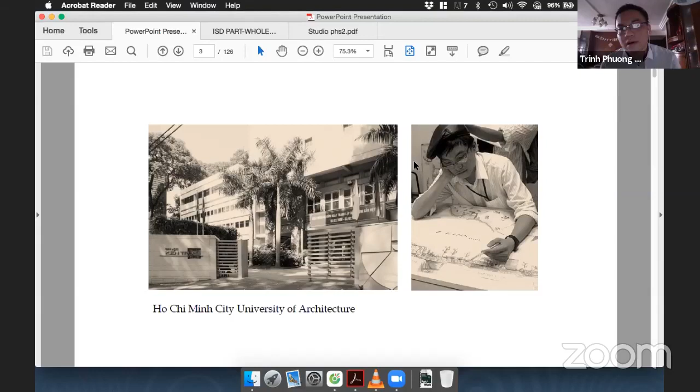This is what students learn and do at my school. In the first and second year, we started with hand-drawing based studios, and some other activities like presentation and making models for discussion. This is our first and second year studio project. At that time, you needed to be very good at painting to do the visualization, hand rendering, and you start with some basic designs like villa, cafe shop, bookshop, for first and second year students.

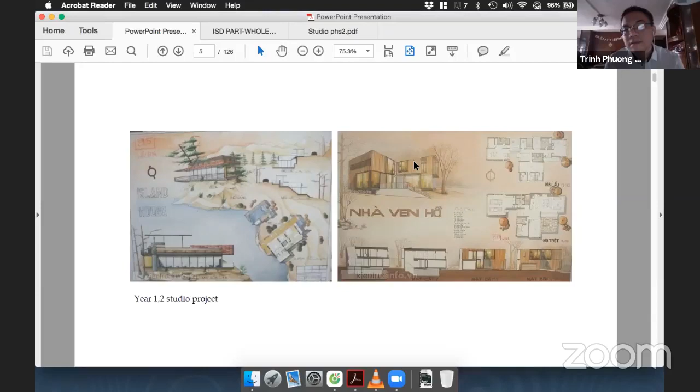At that time, I didn't have any idea about what sustainable architecture was. No, I didn't know anything about that. This is my friend's studio project and my studio project. You can see the difference, a huge difference. Actually, I'm not good at painting compared to my friend.

And at that time, I felt a bit ambiguous, worried about my future career. I didn't know, because I felt very reluctant when I did a studio project. I didn't know what I should do for my future career, I didn't know at all. And when I saw the grading, compared between me and my friend, I felt very disappointed. Sometimes I lost a sense of direction. I didn't know what I should do for my future career. Sometimes I felt, well, maybe I chose the wrong job already, and I just always wondered about that.

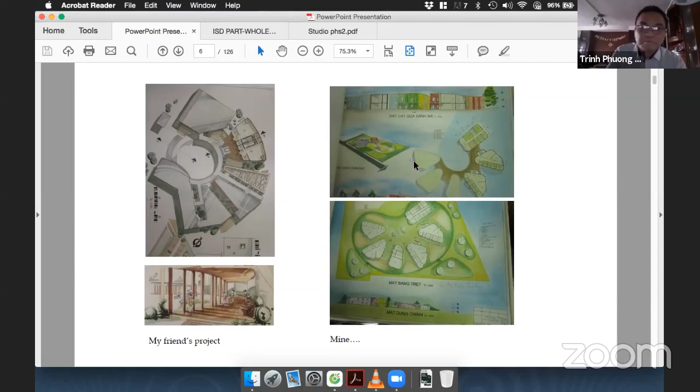This is my studio project, the kindergarten. At that time, I spent one night thinking about what is my advantage, what should I do to improve myself, to stand out among 100 talented students in my batch. And I dreamed about working overseas, traveling overseas. At that time, I wasn't able to afford that. So I thought about that, and I thought about others' weak points. What is their weakness?

For me to improve myself, to stand out from all the classmates, I'm thinking there will be three things I can do in that time. The first thing is improving English, because our teaching medium is Vietnamese, not English, at school. I think if I am capable of conversing in English very well, I can have an advantage compared to my friends.

I'm not good at painting, I don't have the aptitude in painting. So I start learning about BIM, SketchUp, and CAD by myself to improve as much as possible. The third thing, because I'm not good at the school project, is competition. Maybe it's a good chance for me to win a design competition, and have a chance to travel overseas.

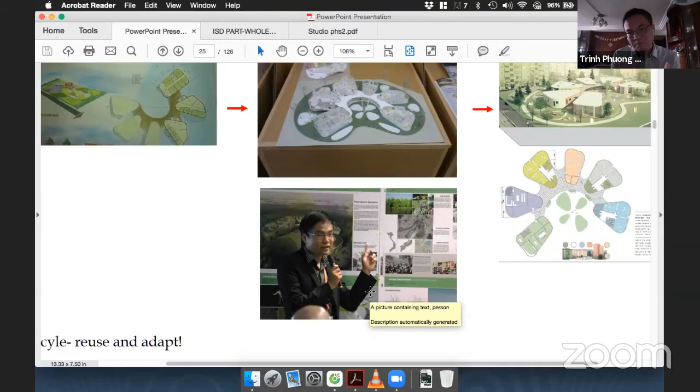I retain the form and shape, it's inherent for myself, but I change the function. You see how it's affected. And in this competition I won again, I was selected as a finalist. So try to reuse and readapt.

For this design competition, I submitted for a Milan competition for the town council, who want to construct a new kindergarten in the outskirts of Milan, Italy. I won second prize. It's a pity I didn't win first prize, I would have gotten my first building realized in Europe already.

But for other competitions, the more mature you are, you need to be professional and improve your presentation skills, which can change the game in the last minute. Your project may be good enough to be shortlisted, but if you want to win first or second prize, you need to be very good at presentation to convey your idea and persuade the jury and audience. This needs practice. Practice makes perfect - even I needed to practice a lot from my very first competition.

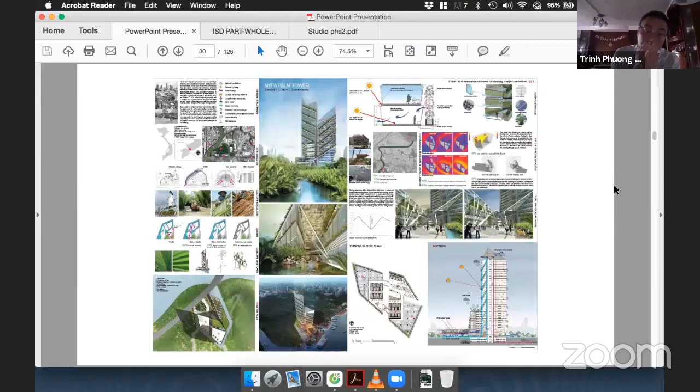When jury members look at your submission, they have to check hundreds of entries and don't have much time. So you need a very clear title, legible, with your target indicated on your panel. They need to quickly know what your project is about and what makes it impressive. Make your title clear and clean, so even a fifth grader can understand what you're talking about.

The second thing is you need an impressive rendering that's easy to understand. When I talked to Safdie, he told me after the break why he selected me as a finalist. He said it was because he looked at my second rendering - he had been to Vietnam before and was interested in Mekong Delta culture and its tropical atmosphere. It looked impressive, and that's why he chose me as a finalist over 100 submissions. So you need a rendering that's catchy for any audience.

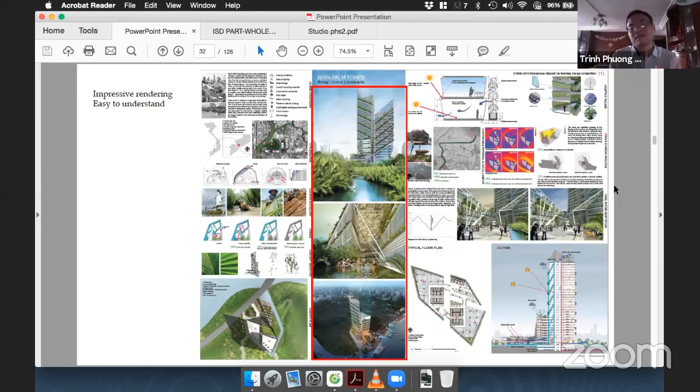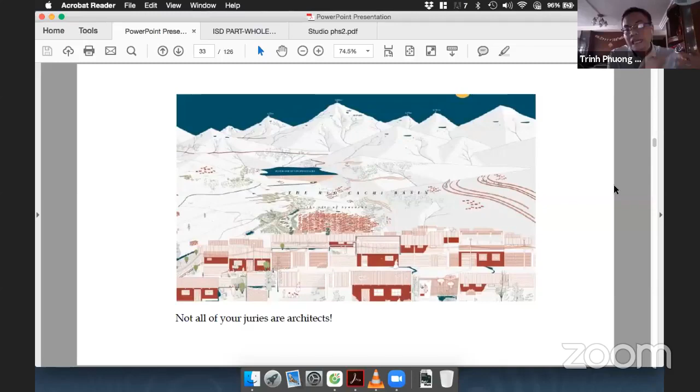So I persuade you to use realistic rendering, one or two, so anyone can easily understand what you're talking about. This kind of rendering is good - you can add one or two in your submission to balance architectural aesthetics with being easy to understand for people outside the architecture background.

Of course, you need some prologue or description, because people need to read a bit - but don't put a whole panel full of text or methodology. Just briefly introduce your project: where it's situated, what your target is, what your idea is, and how you translate it into form and function in your design.

For design strategies, if you're designing a sustainable tower, briefly indicate the strategies involved - like natural ventilation, lighting, solar energy, local human resources, rainwater harvesting. Put it with icons so anyone who doesn't have time can easily understand.

Don't forget basic information like GFA, height, plot ratio, and green ratio, because most students just convey the concept, not the data, which is crucial for jury members, engineers, and designers. If everything is clear and transparent, it makes you stand out among 100 submissions.

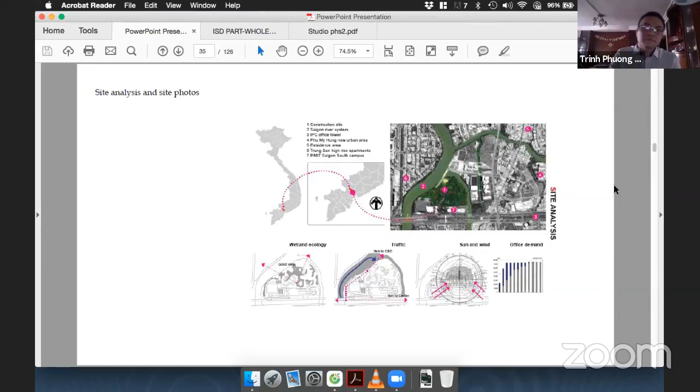And for the diagram, you see the big angle. You need a very good diagram, a sequence of diagrams to convey the idea to anyone - it looks like a comic book rather than architecture design. Make sure that any of your ideas are conveyed into diagram. I don't need to write anything, but you look at this and you can understand what is my concept.

Some sketches are important if you're good at sketching, so please add it in. You need to explain some diagrams like how you're building, the function of your building, how to access your building, the traffic, human traffic, the green and blue arrangement in your building. Make sure everything is legible, clear, easy to understand as much as possible.

And of course, you need to put a master plan indicating the function of the building, even the plan. Don't put 5 or 6 level plans. You don't have to put any plan or section like a tender submission - just select the best view, the best plan which can convey your function, your design idea in the panel.

And don't forget to clearly indicate the function. Some students are kind of artists - you put the plan and ask other people to understand, but they don't have time. So please make sure to put in the function, the arrangement, all the annotation, description, and the scale bar - quite important.

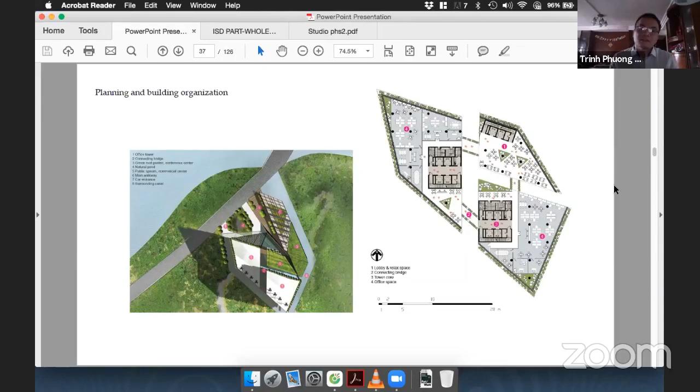For the section, it's quite interesting because it reveals all of your systematic work, how your space is arranged, your strategy, your sustainable strategy. So in 1 or 2 sections, please indicate it clearly. If you have your strategy, you should put it in.

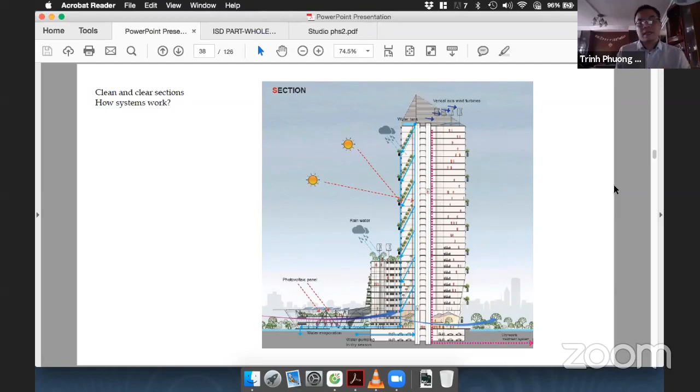So here you can see how the water is harvested, how the ventilation is applied for the ground floor, how the waste is treated, how the rainwater is harvested to water the green facade on the building. Just make your building impressive, easy to understand, and show how the system works.

The last thing I recognize - in any competition, we are just focused on the idea. You have a great idea and you think anyone should be interested in that, but that's not enough, because apart from the quality of your design, we need some quantity analysis, because it reflects the result, the efficiency of your strategy. So if you can do the simulation, if you can do the analysis, please put it in.

You should use icons and percentages. Like here, I show 40% of solar radiation is reduced on the facade after I do the simulation. So I can present anything in a percentage figure. Anyone can just take a look at this and easily understand - it's very persuasive and so clear.

Like you got 70% of the walkway area, public space covered by shadow - you indicate it on your panel with your simulation and analysis. So every jury should trust in that, trust in your design. You have the clue, the consequence, and the very good result. Make sure to use icons and percentages to visualize the quantity and quality of your design.

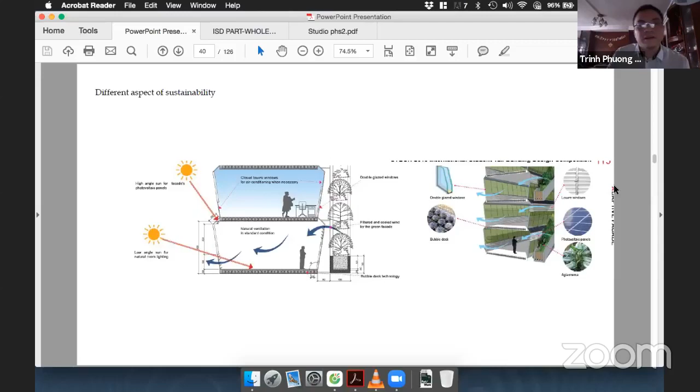I think most of you will be familiar with that, so please have blow-up details indicated on your panel. So in conclusion, we need it clear, clean, easy to understand - anyone can understand, even if they're not from an architectural background. A 5th grade student can understand what that design is and the logic. We need to indicate the quality and quantity of your design.

Anything should be presented by number. And finally, it should respond to the judging criteria. So that's the 5 important things in design competition.

Okay, so after competition, let's take a look to improve our portfolio. Not all of this is mine, but I refer to some other external sources and from my experience, I share with you.

Portfolio is a crucial part for our architecture student, right? If you want to apply for a job, where's your portfolio? You want to pursue a postgraduate study, where's your portfolio? So portfolio is a collection of assets in your design work. You should show your skill and think as a designer, how well you can communicate. And it should be your project.

So I take an example from my friend. He graduated from Harvard, and was also a finalist in the competition in New York, and we know each other, so I take his portfolio as a reference. The very second page of your portfolio should include a short CV or a content page, because if someone wants to review, you need to indicate your CV instead of a separate CV. It saves their time, and they know more about you. You should add some photos here, like if you are in the crit - it's very impressive.

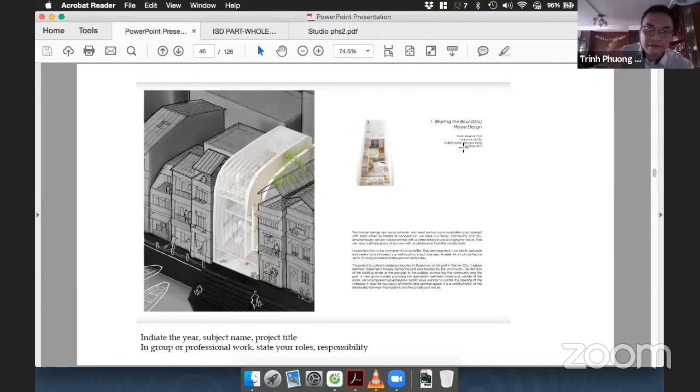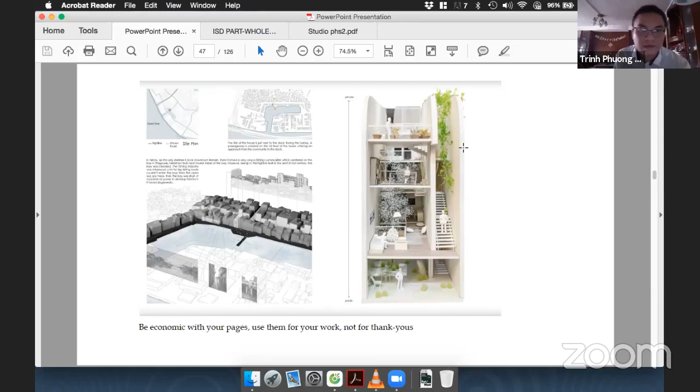So be economic with your pages. Use them for your work, not for a 'thank you' page or posting very irrelevant content. Because some portfolios restrict the number of pages - 30 pages, 50 pages maximum. So be economic with your pages.

And the layout should be professional - if you can, do it in InDesign. You should demonstrate the sensibility of care in the layout. You see all of the images are aligned, put in proportion, text, images, annotation - anything is very clear, very neat and clean. So be professional in the layout. Try to use InDesign or maybe other layout software for this task.

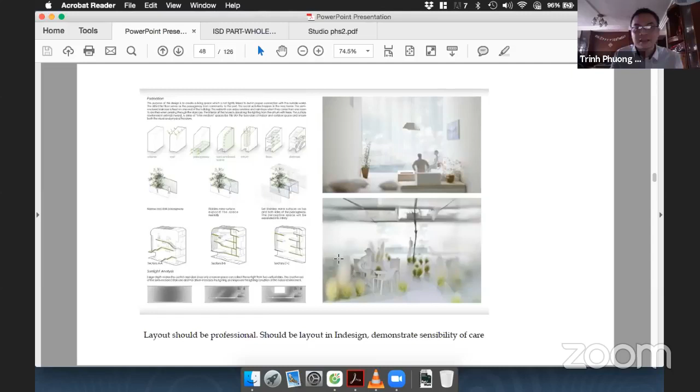In your portfolio, you need to demonstrate a wide range of skill sets - maybe hand drawings, sketches, physical models, construction drawings if you already work in a firm, photography, render images - you should put it in. It should be a collection of a range of your skill set rather than, if you can, rather than hand drawing only or rather than 3D model only. It should be a combination of these things.

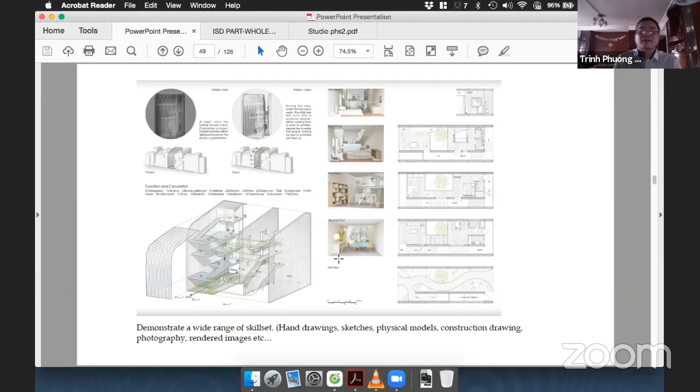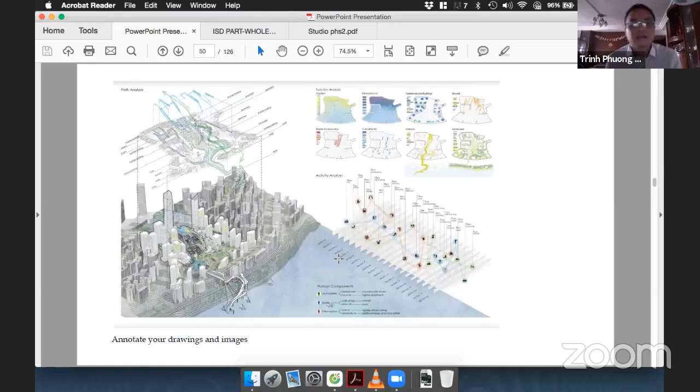And you need to annotate the drawings and images. This is a very familiar habit problem of architecture students - we get lots of good and wonderful rendering and diagrams, but we don't put any annotation, so no one knows what it is about. So for any analysis, any diagram, annotate it carefully so anyone can understand what you are talking about.

And because in this period the hard copy is gradually being omitted, disappearing, you need to do something with the online portfolio, right? You should have your personal website, a kind of online portfolio, demonstrating your project. This kind is very interesting - you can promote yourself, then if they are interested in you, they can take a look at this. It's very helpful.

And if you don't want to do a website, you can upload a portfolio on some publication platform like Issuu. It's a very good virtual portfolio platform. So you upload your portfolio, your collection of work here, and anyone can take a look at this. Very interesting.

Some sources I persuade you to take a look at: Issuu, Wix. Wix is good, very free - all of them are free, you don't have to pay anything. On Wix.com you can design your own website, just drag and drop from the layout, and then you have your online portfolio published. Squarespace - if you have money, you can invest like $20 per year to register a domain name with your name, like rtabc.com. So it's a kind of branding yourself for people in the world - they can look at this. It's free, and believe me, it's very easy to use.

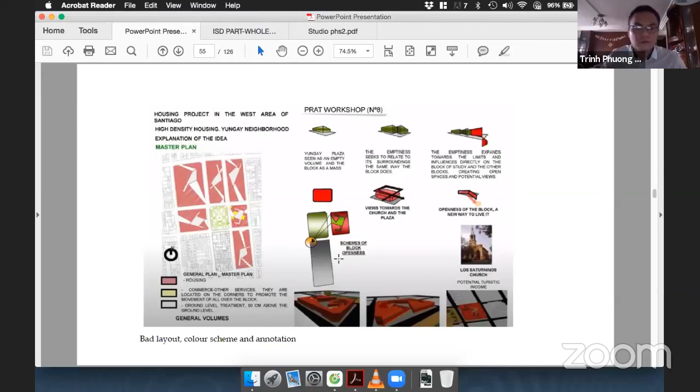So some examples we can use to avoid making this mistake. Like you see this curve layout, it's a quite bad layout. The color scheme looks very itchy, it cannot catch my eye. And the text and arrangement is not tidy at all. So make sure that we do not do this kind of bad layout, color scheme, or annotation.

Make sure, this kind of layout, you can put some hand sketching, but if it's not good enough, think about it, shouldn't we put it in or just ignore it? You see the layout is not well prepared and arranged. This is a very familiar mistake, and I used to do that before.

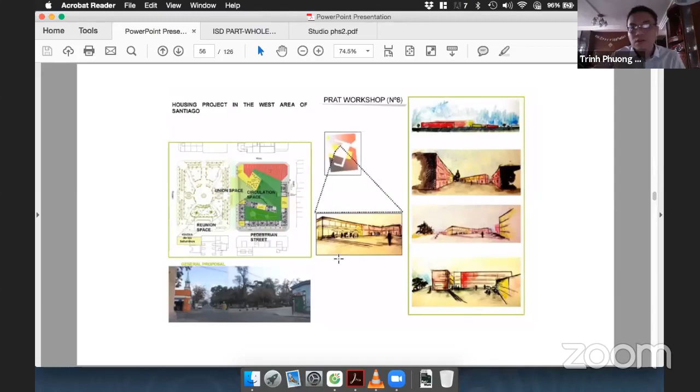So you need to look at some examples, like Issuu or Wix. Look at the portfolios, how they arrange, how they do the layout, to improve. Do not make any mistake like this.

Some students put the grasshopper code, the visual code, on it. It's still quite impressive, but if I am not an architect, if I am just a town council member, I don't understand what it is about. So do not put this information unless you want to demonstrate your Rhino skill, Revit skill, or coding skill.

So the third part is about...

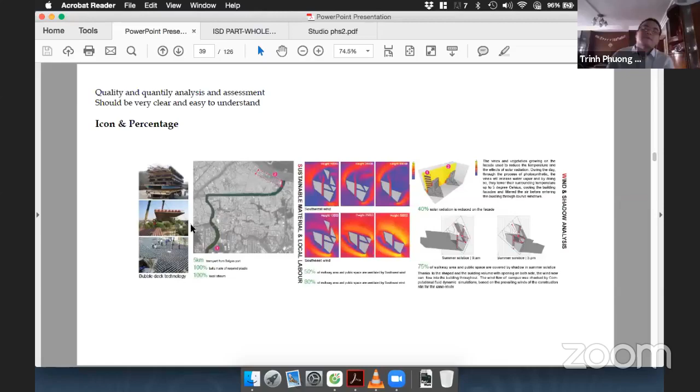Thanks, okay, now I think we can resume with your talk. I don't want to steal your show, I mean at the moment. Yeah, we thank you, okay, you can now resume.

Okay, let me start with part 3: studying and working abroad, what I have learned about sustainable design. What did I change in my mind? I changed my thinking about design and architectural work.

So let me talk about why I chose Singapore. Singapore is one of the developed countries in Southeast Asia, even in the world. They have a very good background in sustainable design, and it's situated in Southeast Asia, so I got familiar with the culture, and importantly, the language is English. Singapore has a quite lower tuition fee compared to USA, UK, Australia. And importantly, because I want to work after graduation, Singapore offers a work visa available for foreigners.

If you're under the MOE bond, Ministry of Education bond, you are eligible for 3 years of working after graduation. It's a duty. Compared to USA, obtaining H1B is very tough, and it also depends a lot. So Singapore is a good choice for this.

They also have a tuition fee loan and financial scheme available for international students. If you attend public school, it's near my hometown, so I can travel back to visit my family at the weekend - a similar culture. Importantly, English is the working language. I worked in Europe before, in Belgium, and because of language - they use French and Dutch - it was very tough for me to find a job and adapt to the environment there. So all of these reasons are why I chose Singapore.

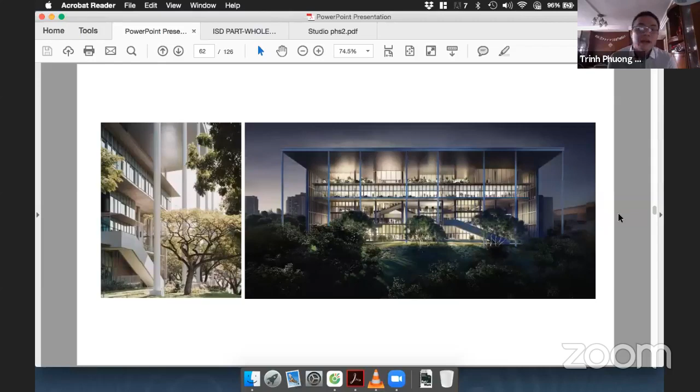The interesting thing is that they apply a lot of passive design strategies, rainwater harvesting, and even all of the energy is net zero because we have a rooftop system to harvest energy from PV panels. So you do not need to rely on electricity from the town. This is a good place for you to learn sustainable design from this building.

I attended this Master of Science in Integrated Sustainable Design, which is quite familiar to my favorite field. Let me introduce you a bit about this program - actually my professor wants to introduce it to you.

It's focused on Singapore and Asian conditions, tackling challenges at both building and urban scale, integrating knowledge from disciplines of architecture, engineering, landscape design, planting design, urban design, and biological design science. So if you don't come from an architectural background - you're an HVAC engineer, or a landscape architect, or urban architect - you can still join this postgraduate course, no matter where you came from.

And students came from a variety of disciplines. In my batch, some students came from China, India, the Philippines, Indonesia, some from Europe, USA. At that time, I was the only Vietnamese in my batch.

And the important thing is it's a 1-year degree, so you save a lot of time and money. I just wanted to quickly graduate and find a job, so I chose this program. It's appropriate for me since I don't have to invest too much in the tuition fee.

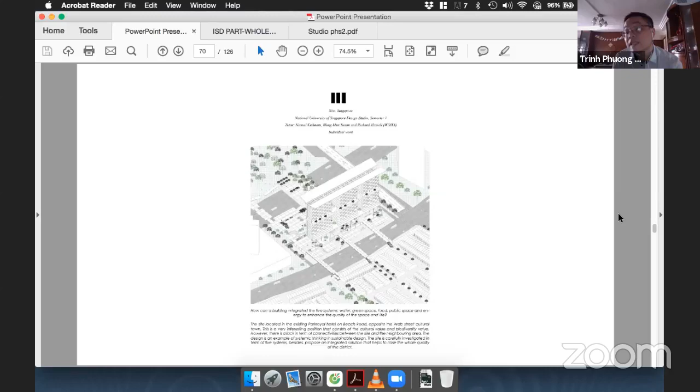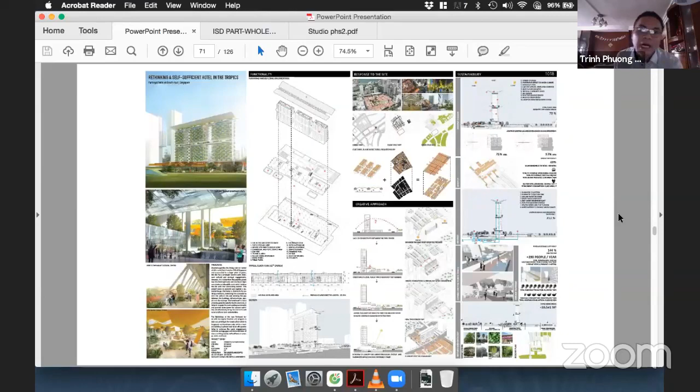In this design studio, we were very lucky because we got guidance from architect Wong Mun Summ from WOHA Architects, one of the most famous architects in Southeast Asia, who taught this building scale project. This is my project - actually a submission for another competition after my design studio project. You can see I strictly followed the rules I mentioned before about this project. So this is a rethinking of a self-sufficient hotel in the tropics, a case study in Singapore, the Parkroyal Hotel on Beach Road.

So the very first stage, we need to respond to the site.

So we study the building in terms of the 1 by 1 kilometer scale. We study about the surrounding buildings, because the building is now situated opposite to the Arab Street, which is a very

interesting tourist spot in Singapore. It inherits from the Malay, the Islamic culture. So it's very interesting in this area. You have the new and the old. You have the park, and the river with the water reservoir next to it.

So it's a very interesting location. We study about the asphalt map, the public space map, and the green space, and you see the integration, the existing condition of the site to their neighborhood. This stage took us three weeks to study in depth. This is just a very small portion of what I presented on the panel.

But this is just to give you some of the glimpse of what I have for the culture and architecture relationship, because it's situated next to the Arab Street, as you see in this area. So I'm thinking about how to make it integrated, incorporated into the existing site.

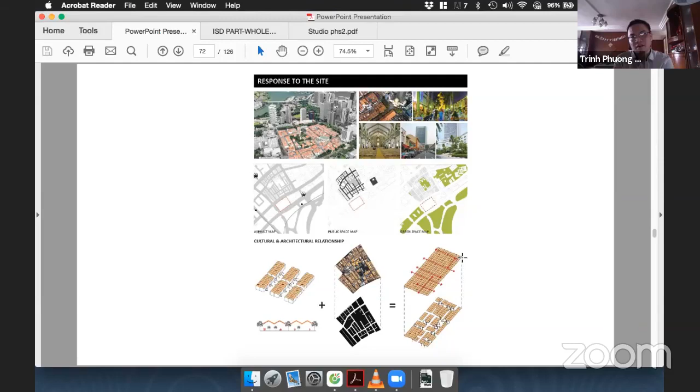So I was thinking about it, and I decided to make a very big roof as a community space, divided by different axes to make it an incorporated whole to respond to the site. And this is my design, a very big roof, orange roof, sloped like this, inherited from the existing site condition, to be a part of my building. So this is my idea.

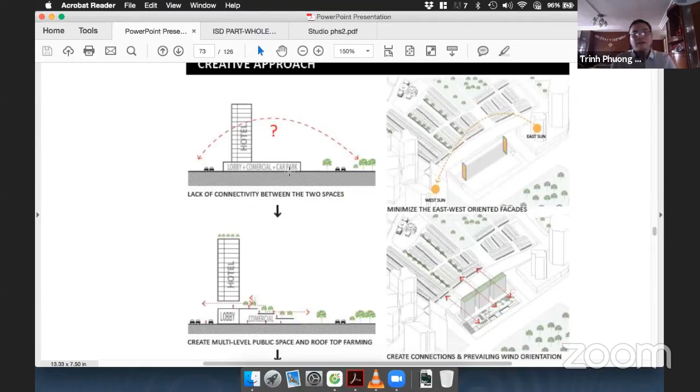So for the creative approach, from an existing building like this, a hotel with the lobby below. Let me zoom it a bit. So I'm thinking about it - with a very conventional hotel, lobby and commercial car park like this, it segregates the highway

and Arab Street. So I'm thinking about opening it up, lifting the hotel and the first floor plan, making it become an open public space, connecting with the tourist spot here, connecting them with the park, and incorporating the green spaces with the commercial space here. And we even free up the ground floor - it's not enclosed anymore.

You can free the ground floor, so we have multiple access connections between the park and Arab Street. And all of this will be covered by a system of roof, which helps equip solar PV to generate electricity, create shadow, and incorporate with the green, and even help with water harvesting in the building. So now it becomes a unified whole, incorporating the building into the site.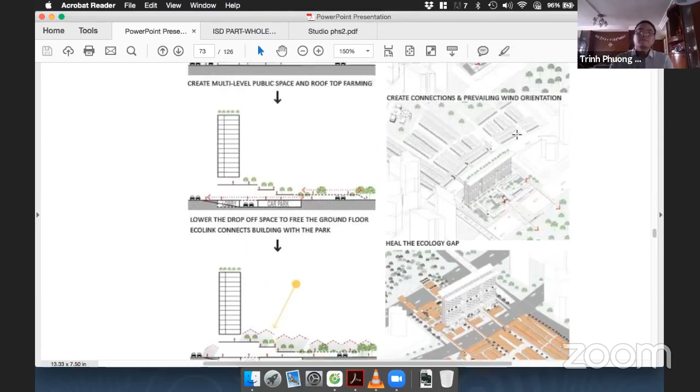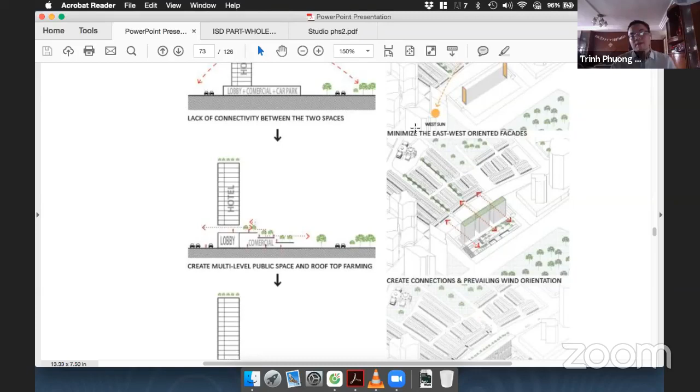You see the building arranged on the east and west orientation to reduce the effect of solar radiation. We connect with the prevailing wind orientation, creating a connection with the site. There's a very big mosque over here, so it increases the connectivity between the existing old and new town, and even has one or two more pedestrian overhead bridges to connect with the park opposite.

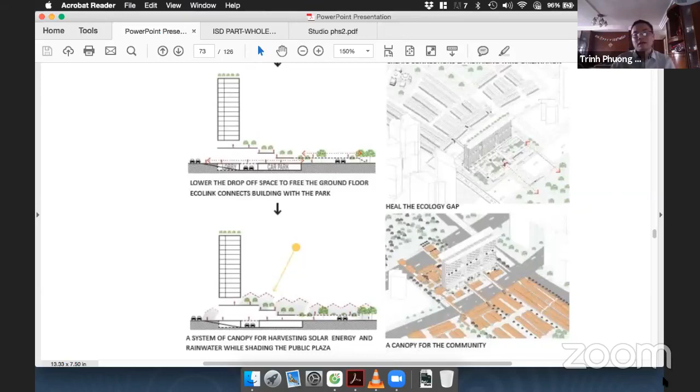And everything is covered with a system of eaves and roof to represent the color, the architecture form and shape of the opposite side, the old side, making it spread around, connecting to the park opposite. So that's my idea.

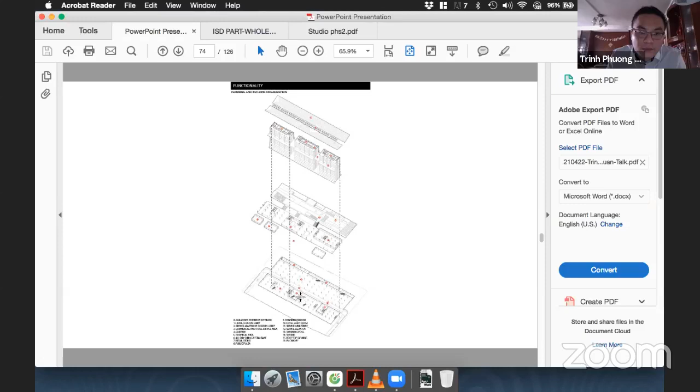And this is my function - actually it's a student project. So you see, I use an isometric to show the resident block, the hotel, restaurant, the commercial block, open space, even parking. I do it in isometric like this, and all the spaces are indicated.

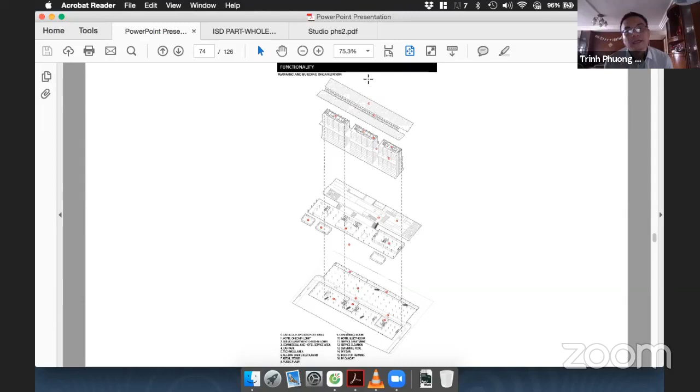So I have a big roof doing farming on top, to make it not only self-sufficient in terms of energy and water harvesting, but also energy and farming self-sufficiency. So this is a section.

You can see we have a quite big roof, harvesting water for plantation, for urban farming, a lot of solar PV, connecting to the existing site. So even the form, the shape is incorporated into a unified whole.

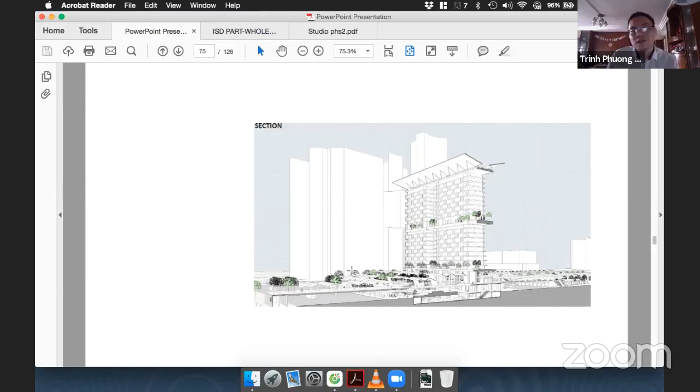And this became a spreading of the Arab Street tile, spreading to the park with a lot of activity, open air activity, and all of these areas are shaded with solar PV on top to generate the power for a self-sufficient building.

So the other sustainability aspect, like passive design, we studied in depth with the solar graph to indicate sun orientation, and calculated for the passive design strategy what percentage of area has natural ventilation. We studied the skin of the building, the facade, based on angle and orientation, to see how much area is covered by shadow, and how much electricity we can generate from the rooftop.

We studied whether it would accommodate enough for the residents in the hotel. After a couple of tries, this is the final result: we nearly achieve 40% energy sufficiency. Because the hotel uses a lot of energy for cooling and lighting, this is the maximum we can achieve. Hotels are quite tough for self-sufficiency.

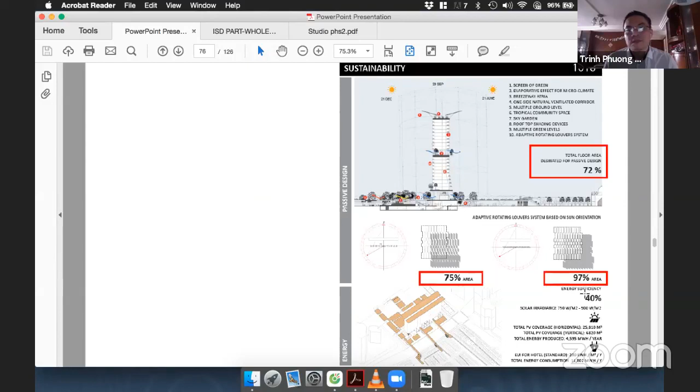We studied the water, how we harvest water for watering plants and for urban farming, and how to incorporate water features in the design to improve the local climate and atmosphere, combined with the landscape. For food and vegetables, it's enough to be self-sufficient, 144%, which can also provide for the neighborhood. For water, it's enough too, 2 times double the required amount for watering plants and even for cleaning or flushing in the hotel. That's our target, and we meet the target.

All of this information is represented in icons, very easy to understand, all the facts and figures. We needed to calculate and present it very clearly, making everything quantitative to understand.

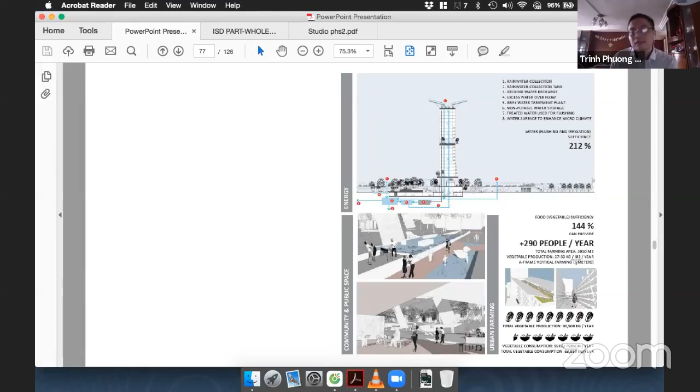So this is my project. The second thing I'll show you comes with a book, which I'll share with you later. This is one of the latest books from my professor, incorporating 3 consecutive studio works, urban scale design projects, about what we've done in the ISD program on sustainable design at urban scale and metropolitan scale. Later I'll share the full link to the book so anyone interested can look at it.

In my year, 3 years ago, we had a great trip to Shanghai, one of the largest cities in China and maybe in the world, a metropolitan. Shanghai has grown rapidly and experienced drastic spatial restructuring over the past 4 decades, since the economic reform began. Now Vietnam shares a similar situation, having started after the economic reform.

There's been a lot of transition in urban pattern in Shanghai, and the city quickly became the world's largest cruise port in the industrial area. It's designated to become a new district promoting international trade, scientific innovation, and entrepreneurship, imposing constraints on the district—a kind of district lost in the urban transition. So we thought about how to improve it.

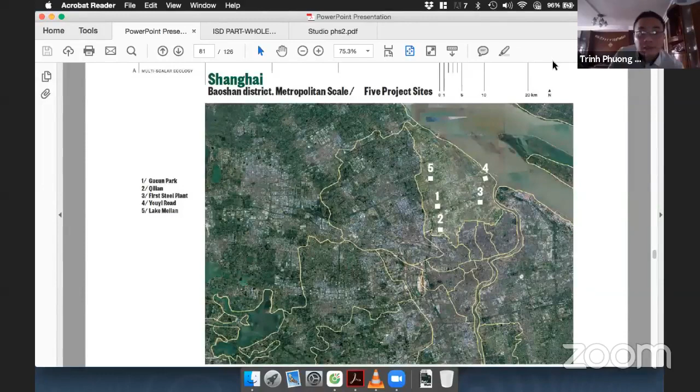In our year, we study Shanghai's Baoshan district. We are divided into 5 groups to study 5 different locations: Gucun Park, Qilian (the first steel plant in Shanghai), Youyi Road, and Lake Meilan. So we study 5 sites with different locations and characteristics, as shown on the plan. Our group focuses on Gucun Park, this site.

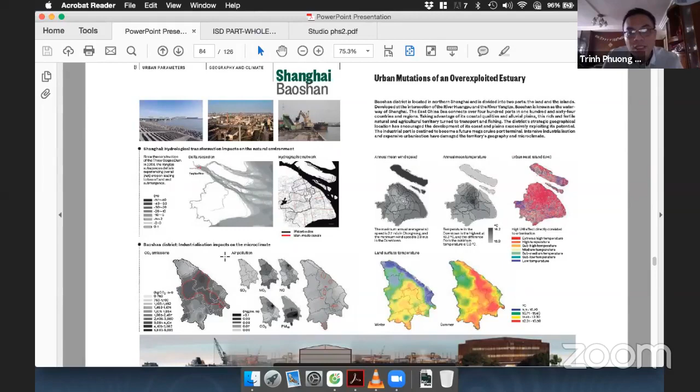We do geography and climate study, because each city has different and similar climatic conditions. So in the very first stage of our project, we study this, which has a lot of effect on our design. We also study the microclimate of Shanghai and Baoshan district, including the tidal map, elevations, water bodies, air quality, and air temperature map. We do the mapping and look for information. Students take one month to do this analysis and conclusion. This is what we've done for the first stage to study the climate of Shanghai and Baoshan district.

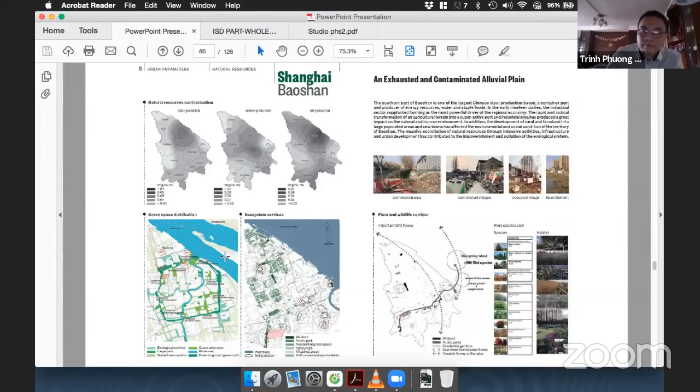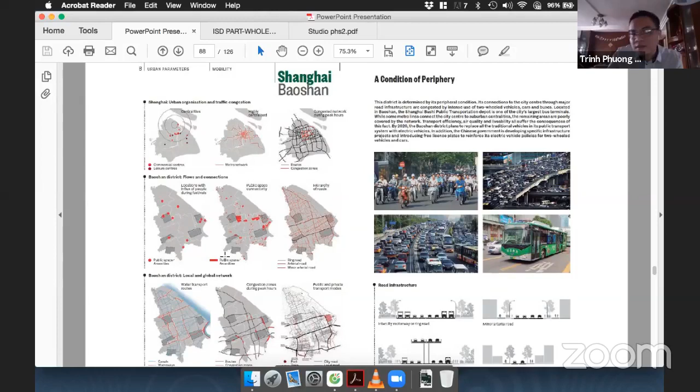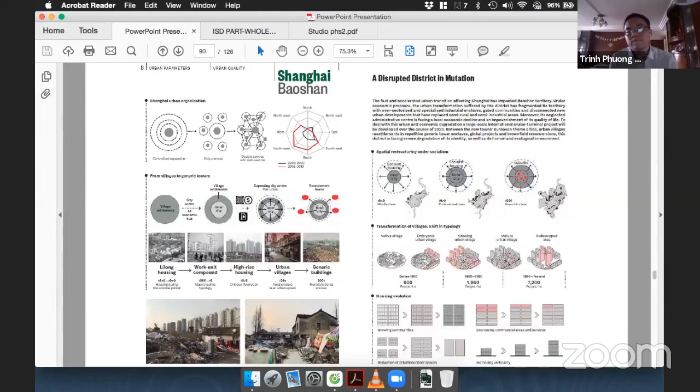We study urban quality, which is quite important. We study how Shanghai transformed from a very underdeveloped city to one of the most developed cities in the world right now. We study urban transition, the housing revolution, transformation of traditional villages, shifts in typology, and spatial restructuring under socialism. We study this in depth.

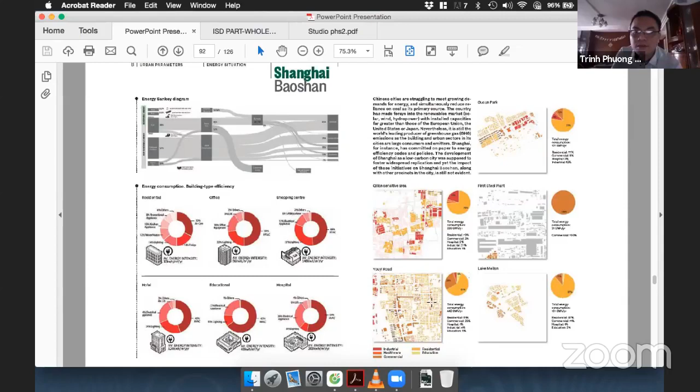We also study the energy situation, how energy is used in Shanghai, using a Sankey diagram flow to study how energy is generated, consumed, and transferred, what percentage is used in each sector, and what sector can be improved. We take some sites in Shanghai, the 5 sites, to study energy consumption and do surveys with local residents for this map.

We start the mapping of the 5 sites, doing the mapping in 15 layers: satellite map, topography, pollution, green network, blue network, public space, road map, asphalt map, mode of transportation, flow of movement, building footprint, building programs, building height, energy consumption, and UHI map. We use software provided by the university to simulate the temperature map and UHI map here.

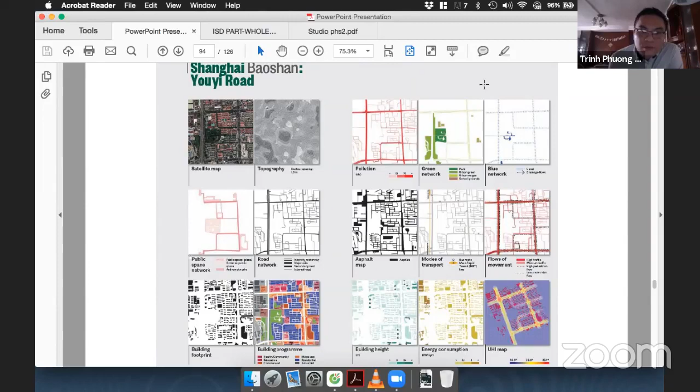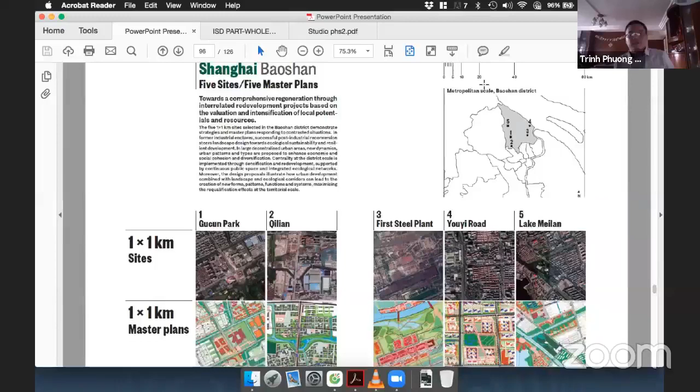After studying it, we think about revising the existing situation to make the site become a more economic, livable environment, incorporating sustainable design features like blue and green infrastructure, enhancing people's connectivity with increased public space and public services, making it a livable environment for anyone. So this is our design studio focused on Gucun Park.

From the existing commercial and conventional housing, we decided which areas should be improved, how to incorporate sustainable design strategies, how to generate electricity ourselves to be self-sufficient, how to utilize the water body as a district cooling network to reduce energy consumption, and how to increase public space and create more connections, making the park not an isolated realm anymore. It's open for anyone, an inhabited park, not isolated just for some class of people. So we study this.

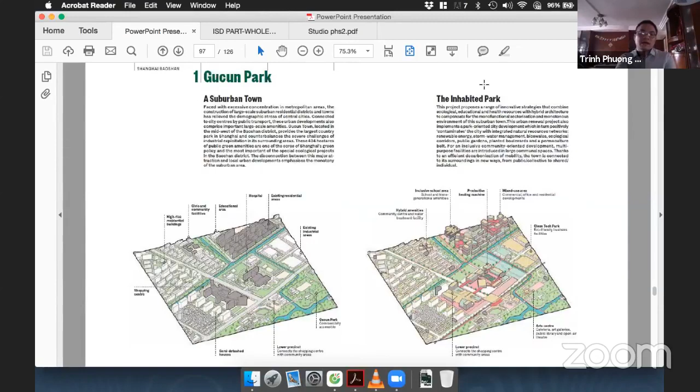You can see the before and after in our proposal to the city council. So for the master planning process, we also...

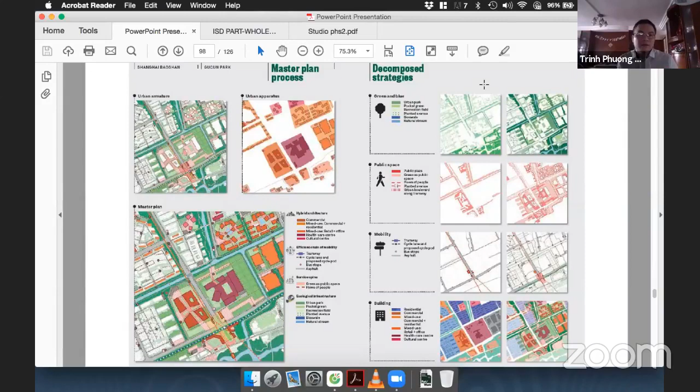We decompose different layers: the green, the public space, the mobility, and the buildings. We split into the urban armature and urban apparatus, then combine them into the master planning. Maybe those of you who have done the urban planning design studio are familiar with that.

We also think about expanding the connectivity to the other side. We study the movement of the green corridor and blue corridor, how they interact, the change of mobility, and how to expand the public amenity to the surrounding neighborhood. We also study some typologies applicable for the site, like commercial, mixed use, hospital, school.

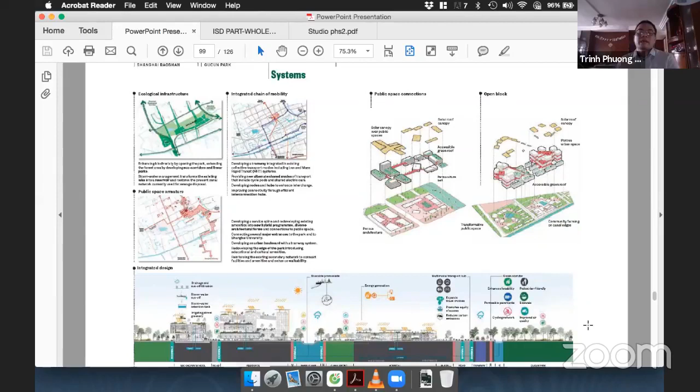And we do a cross-section indicating all of these strategies, what we have to do to make it become a more sustainable neighborhood.

So after doing the 5 sites, we got a new city master plan, integrated ecology and mobility on the site. After we superimpose our 5 sites, we have a new map of Baoshan district which reflects all of the strategies integrated in.

So we propose to the city council the mobility and energy water network, the revised ecological network, how the 5 sites have been connected with the green corridor and blue corridor, how energy is distributed, how waste management works, and how the 5 sites are connected by a new public transport system.

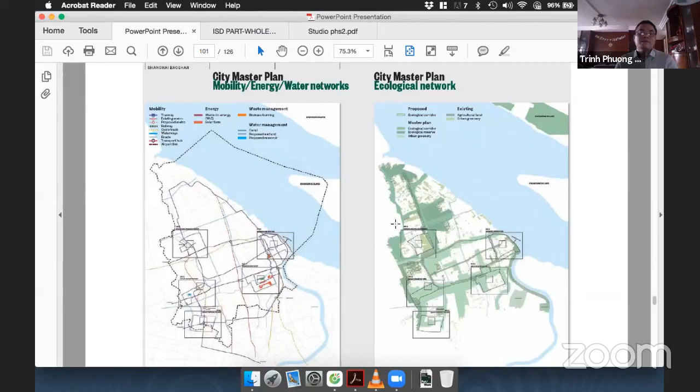The last part of the panel, we came with the calculations. We make everything into numbers and percentages. It should be visible on the panel.

So we don't do anything just by feeling, like adding a tree or decorating a building with some plants and calling it a green building. No, we do it by the quantitative method, so we assess based on numbers and figures.

How has the public green space increased? How has the walkability increased? How many people are using the transportation, by estimation? We do it like that, so everything is represented by numbers.

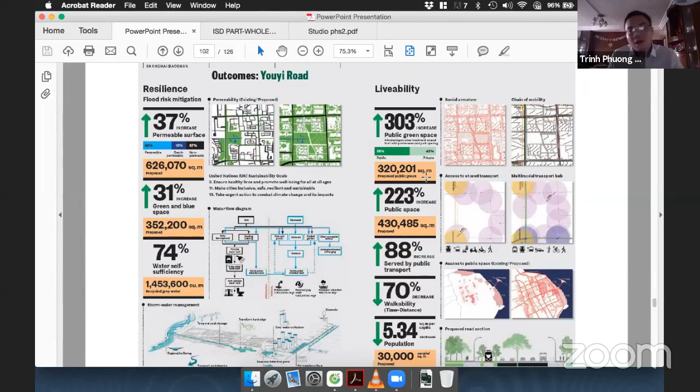As you can see, the permeable surface, how it's increased, how much more green we add, everything. How much energy is generated, is it enough for self-sufficiency on our site? So how much has the energy demand been reduced by applying these strategies?

How much greenhouse gas emission has been reduced. And we also have several scenarios.

We use a tool by EDF Lab in Singapore for calculating and simulating energy use on the site. We have 3 scenarios with different amounts of rooftop garden and solar PV on roof, that kind of thing. So we have different scenarios, and we can assess the most appropriate one to reduce energy consumption.

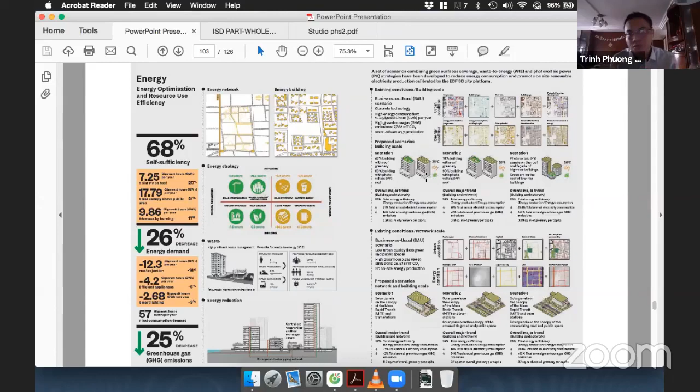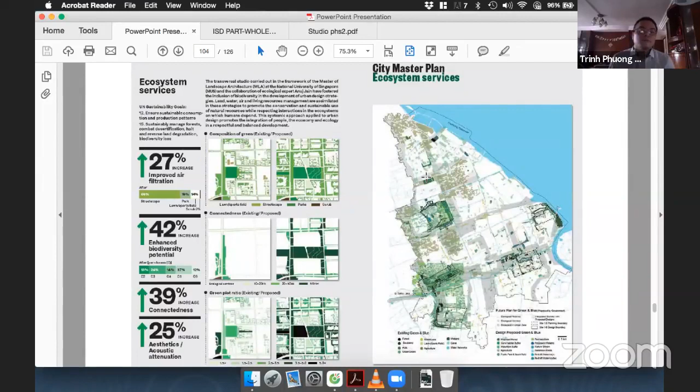Let me share with you a bit about the project I've been working on with my professor, Dr. Nirmal Kishnani. He used to be the vice dean of the School of Design and Environment at the National University of Singapore, and he's also the program director.

I met him during the time I was in Singapore in the architecture competition with CTB, and I learned about this program. So we've been working together for 2.5 years.

I'm responsible for the graphic production and graphic coordination of this book, called Ecopuncture: Transforming Architecture and Urbanism in Asia. We studied quite in depth 20 projects in Asia at different scales, from Vietnam to the Philippines to Indonesia to China to Singapore, using the same systemic thinking: water system, energy system, food system. We study in depth about this.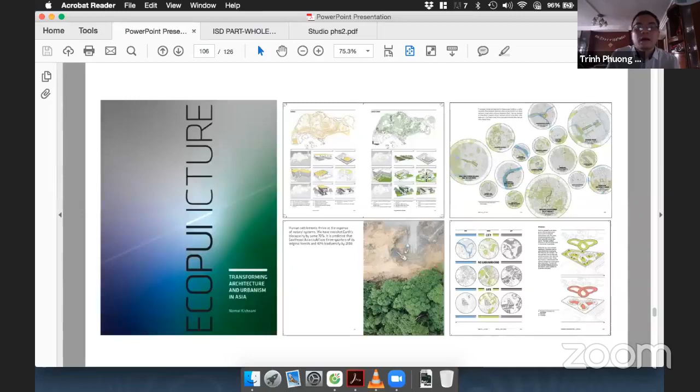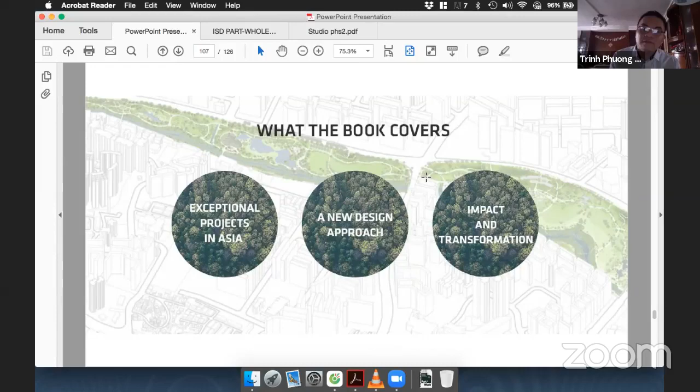So the book will cover exceptional projects in Asia with a new design approach, and it also raises the question about the impacts and transformation after the project is realized.

At the building scale, we study about the form, the fragmented elevated layers, how energy is generated, how we reduce energy, similar to what we've done in our studio project. At the urban scale, we study about ecosystem services used as a framework for describing the flow and process to recover the brownfield.

To study about the water network to restore, which has been fragmented by pollution or industrialization.

So to know more about this book, you should take a look at ecopuncture-asia.com. This is a book published by BCI Asia. You can look at this if you want to study in more depth about sustainable design and systemic thinking. I'm very happy because I was involved in the production, the graphics, and part of this book.

So, okay, the most important thing about being an architect is to earn money, to find a job to earn money. Yeah, we're talking about sustainable design, saving energy, saving the green for the animals, but we need a job to survive, to sustain. That's just the happiest thing of being an architect - find a job and earn money.

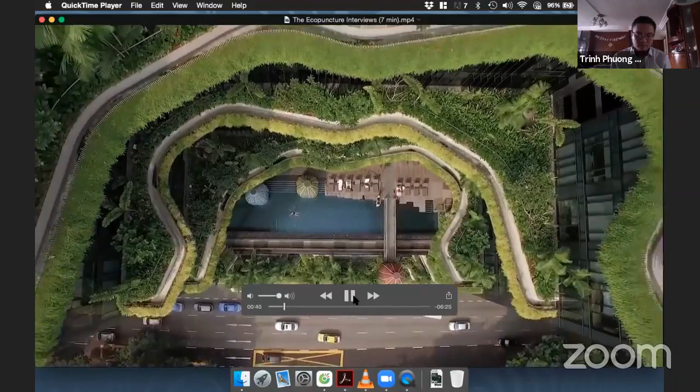For about 18 years, we've been looking at ways of incorporating greenery on the roofs and other areas of buildings. A few years ago, we thought, once we've got this infrastructure of life-bearing areas of the building, you can think more strategically about what that might be. This greenery could perform other services such as food and vegetables or supporting ecosystems. I think it's a great and exciting new avenue to think about designing for life rather than just designing for humans.

We are responsible for the problems faced by our planet. We have polluted water and air, contaminated soil, released carbon into the atmosphere, and replaced natural ecosystems with cities and farms. To do less harm today is simply not enough. We must find ways to repair and restore, to do good. Our buildings and cities must protect and support nature so that life can flourish. But what does this look like, and how does it work?

Oasia Hotel Downtown is a 27-story mixed-use development comprising a commercial component of offices and a hotel component above the offices. It's an almost 200-meter tall tower with a footprint of only 45 meters. We managed to create a living facade that allows creepers, shrubs, and trees on the horizontal level as well, to become an ecosystem for animals, particularly climbing animals.

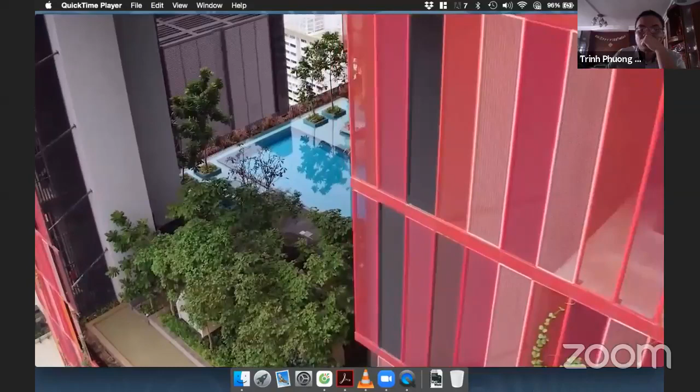With a post-construction survey and audit, we found animals able to move onto the building itself. We realized that if buildings of this nature were next to parks, we could extend the urban habitat substantially. Oasia Hotel Downtown is an example of constructed nature, the overlay of human-made and natural systems. But how do designers begin this process of integration, and how can they know if it will work?

We need a more effective, more inexpensive, and more multifunctional landscape approach. Underneath is the nature, above is culture. You cannot separate culture from nature. Ecology is essential. You follow the natural rhythm or natural pattern to create a new form. The river systems, wetland systems, natural forest - these provide ecological services.

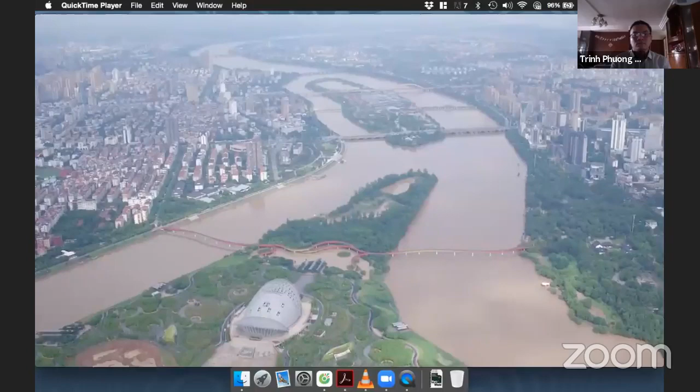Yanweizhou is located in Jinhua City in Zhejiang Province. It is inspired by the Chinese farming technique to create flood-adaptable landscape, or resilient landscape. We deliberately removed the concrete wall to transform the gray industrial infrastructure and replaced it with terraces of vegetated landscape.

We built this park in the center of the city. Before, the city was separated by two rivers, and we built a bridge across them. Because of the recovery of the ecological green heart in the center, this park has become a meeting place. The bridge has become a public space connecting the separated city. It has become a catalyst, socially, culturally, and economically.

We are quickly discovering that nature sustains our lives through the services it provides, and that we must not disrupt these services—where possible, mimic them in the things that we create. Can buildings purify the air? Can a park clean water? Can a neighborhood act like a forest? These ecosystem services are vital if we are to survive and thrive as a species.

I call my approach the art of survival—planning and design based on ecology. We want to leave the Earth at least no worse off, and hopefully in a better position than we found it.

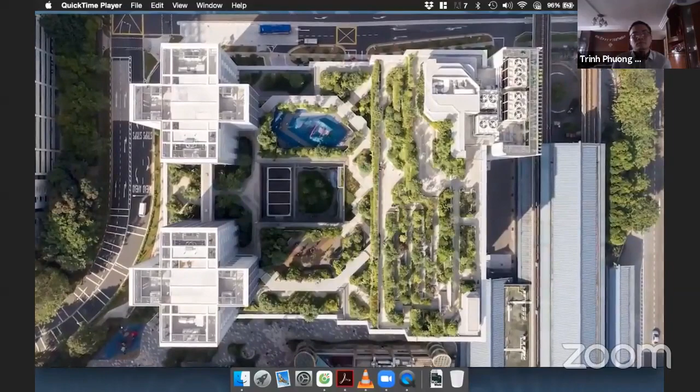A well-functioning ecosystem is almost the most enjoyable environment to be in. We can create substantial ecosystems in the city. People are happier, people are healthier, the air is cleaner, we're using less energy, which in the end will translate to economic savings as well.

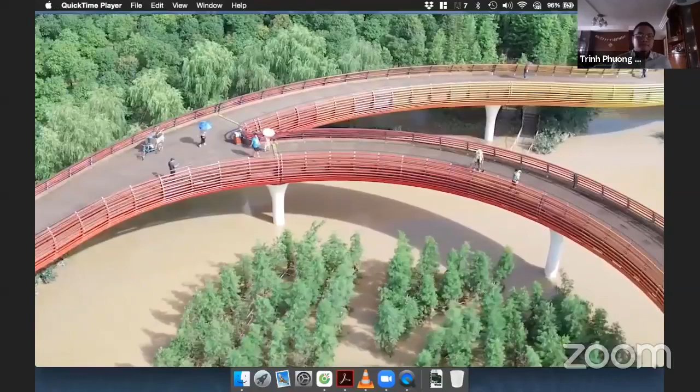So it seems like a no-brainer, right thing to do. Change begins with imagination. We must visualize a more connected, livable, and compassionate world in which all life is valued. The designers in this video ask if their work can become a force of good. Now imagine a world in which every building, every park does the same—acts of eco-puncture that seek to reconnect humans with nature.